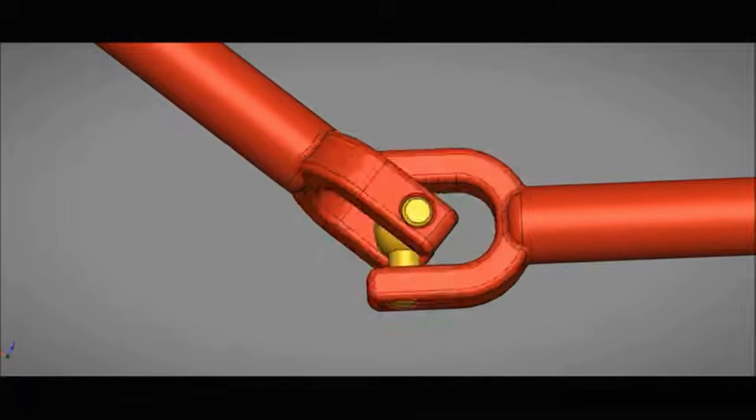Today, we're going to build one. So first I'm going to open up Autodesk Inventor Pro. This is the file I use for all of my computer design models, 3D models for 3D printing or for engineering projects. That's just because I get this software free from my university. The same things I'm going to show you on Inventor, you could also pretty easily use on SolidWorks or any other engineering application.

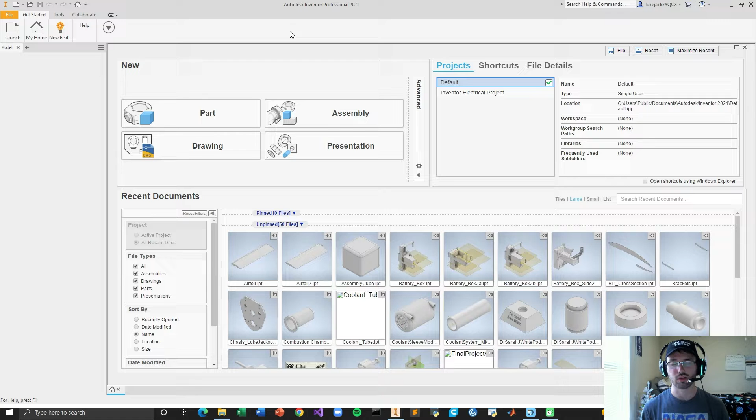So we're going to go File, New, Standard Part, Create. First things first, I'm going to design the part of the joint that actually holds the axle and rotates around that center piece. I call it the joint holder, personal part title preference.

So we're going to go Sketch, Create, Rectangle. Personal preference, I always start on the XY plane. Now I want this to be 100 millimeters by 50 millimeters, but I'm going to start by creating half of the part and then revolving it. So I'm going to start with 100 by 25.

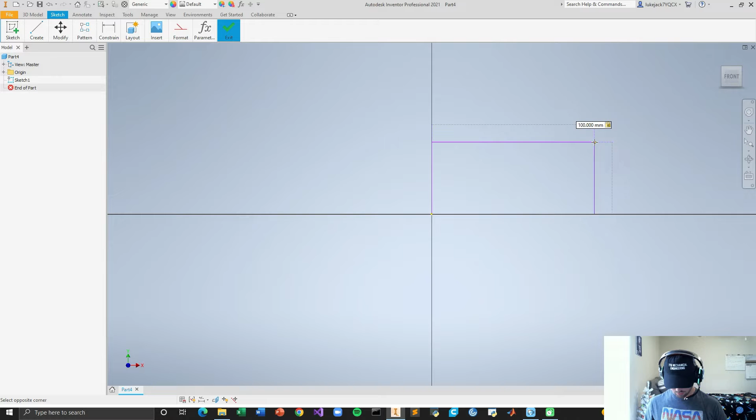And then, like I said, right away we're just going to revolve this piece, go 3D model, create, revolve. Already have this plane selected as profile, axis, the x-axis. Now instead of 360 degrees, I'm going to rotate this 180 degrees. That's because I'm using a 3D printer to manufacture this joint.

When I go to print this out, I'm going to have a hole for the axle coming through here. I need to actually be able to put this piece together around the axle rather than having a hole here and having to feed an axle through to meet at a joint with a cap on the end. It's going to be a lot easier to assemble this by just printing the whole axle with the cap on the outside and the joint together all as one piece, placing this piece and this mating half around the axle, gluing it and calling it a day.

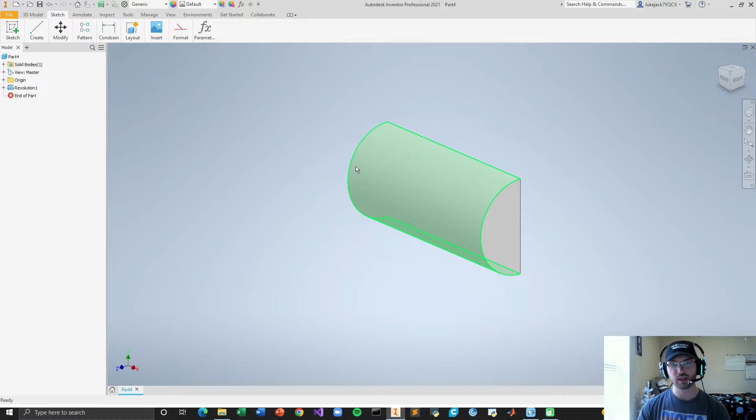Another reason for that is if this were a full cylinder and I go to print this out, one of these curved sides is going to be on the print bed. And when that happens, I'm going to have supports that go all the way across here. This entire face is going to be covered in support structure. Now it's going to be a big problem when I go to try to take the supports off and sand this down. It's going to leave extra material we don't want, or we're going to have a lot of sanding we don't want to do.

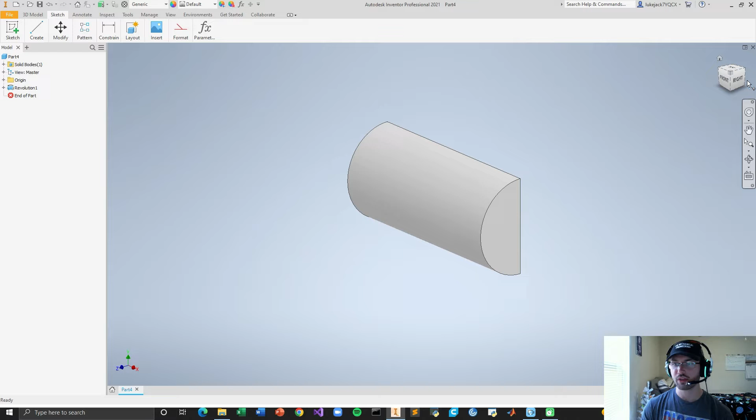It's going to be a lot easier to just make this in half and then print 4 of these for the total joint together. So now that we have our half, I'm going to come around to this side, and I'm going to cut out the section that's going to wrap around and actually have the holes for the axle to hold that joint.

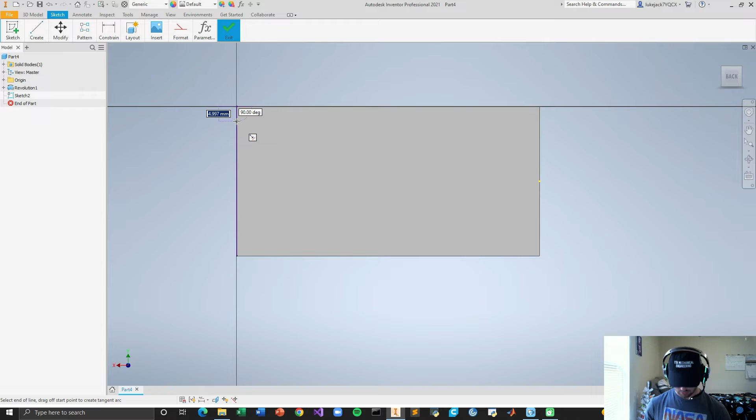So I'm going to go Sketch, Create, Line. I'm going to go right here, and I'm going to start by putting in the lines that mark out the sections here. First we're going to have 10 millimeters coming down at 90 degrees, and that's going to mark out the section that's going to hold the joint. So you can imagine if this line around is the section coming up, the axle would come through here and the joint core is going to be right here.

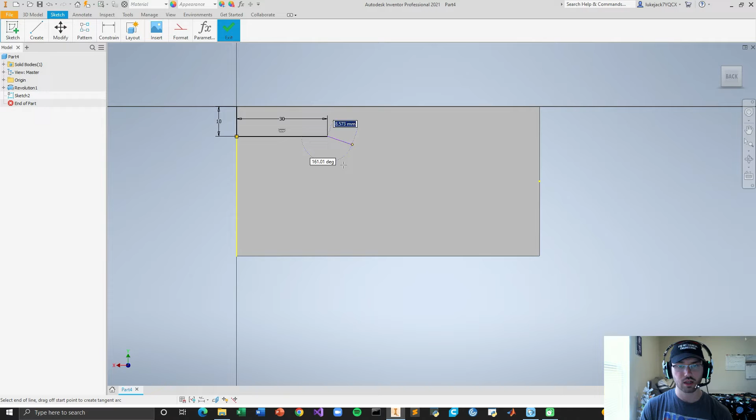I'm going to bring this over here 30 millimeters, another 30 millimeters, and then up another 30 millimeters. What this does is create a nice square for that joint core to come into while producing a full centimeter on either side to actually hold that hole. This way we have thick enough material on either side so that we don't really risk significant potential for stress and catastrophic failure around the points that normally develop a majority of stress.

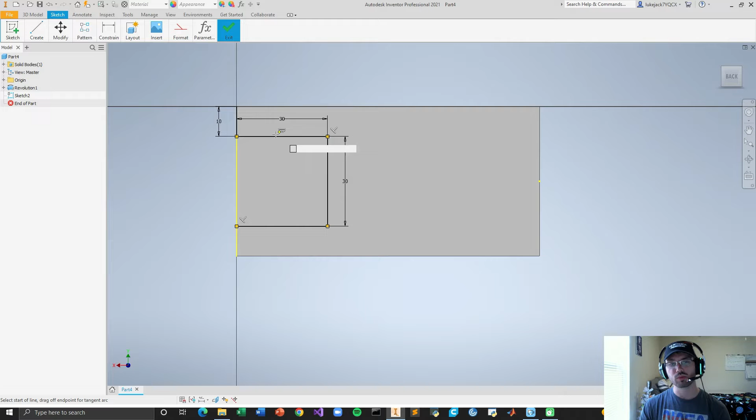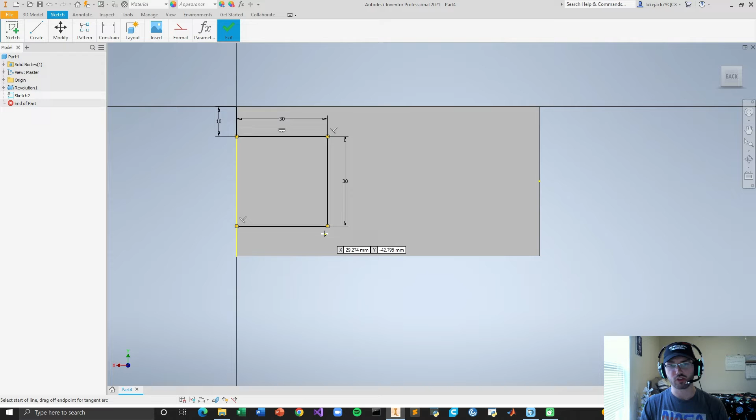Now, one problem that's going to develop here is stress over time as this part wants to move outward like this or inward like this, really just as a result of stress from repeated rotation. All that stress is going to build up at this point here, and that provides a point of potential failure. Plus, this one square probably isn't going to be as much room as I need. So to kill 2 birds with 1 stone on this one, I'm going to go Sketch, Create, Arc.

Make a half circle right here. What that's going to do is first, thin out this joint cavity for extra space for motion. But second, and pretty importantly, this is something we learn in classes typically taken in our first or second year of an engineering program: the stresses that normally develop center around this one corner. Once you put a fillet across that corner, which would now be down here, all that stress distributes evenly across this full radius.

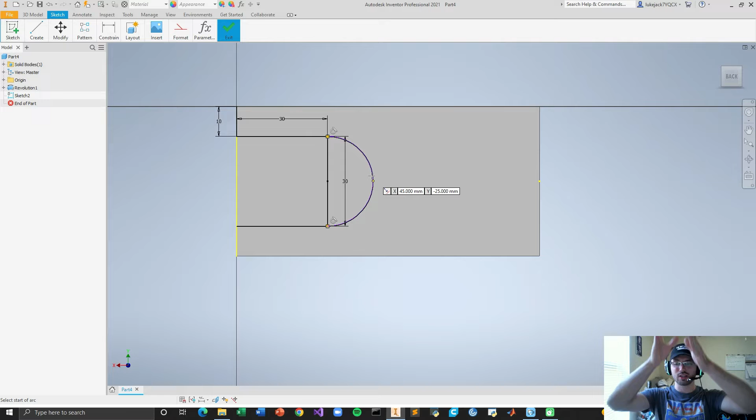This is actually, from an engineering perspective, why you see the roots of a tree come down like this and then spread out. It spreads the stress out across here in a really phenomenal pattern from an engineering perspective. So we have our full cavity here marked out as lines.

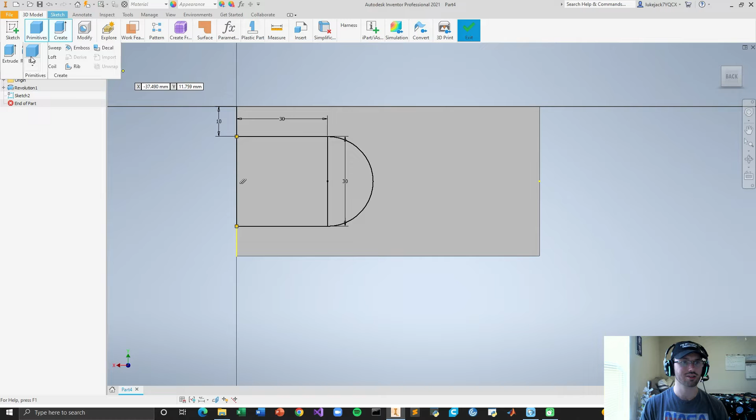We're going to draw another line right here to wrap up that sketch. That way we can select these two planes and extrude the thing all the way through to cut out that material. So we're going to go 3D model, create, extrude, select both of these profiles, select extrude cut, and then just any large number that's going to completely take care of all of the material there.

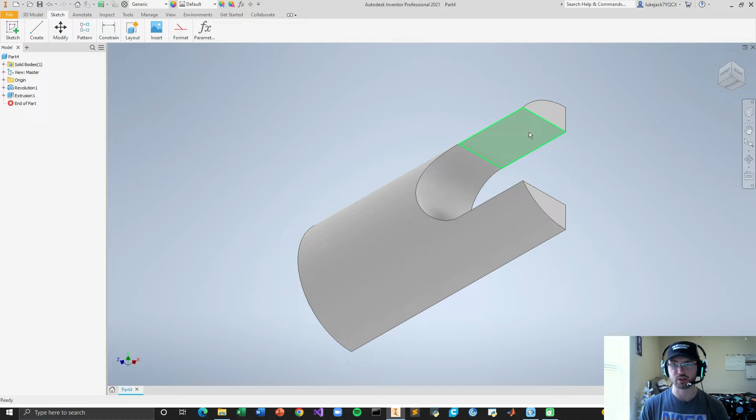So now we have a lot of this pretty much done. First, before we're finished, we need to make the half circle for the axle that's going to come through. So I'm going to go sketch, create, line, set right here.

Now I know that the hole for the axle is going to go somewhere on this plane, probably closer to here than to here, because wherever the axle goes, the other piece is going to need to come over as much as this section, the whole section, and another one of these sections over. I need to make sure that these parts don't interfere.

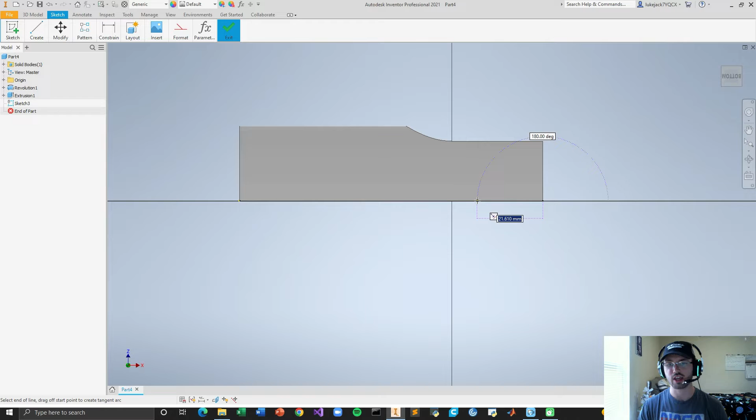So I have a total of 30 millimeters this way. I'm going to make sure the other part doesn't come further than 25 millimeters, just to have as much room away from any potential interference as possible. So 25 millimeters, I could say a centimeter, and then half a centimeter for the hole, and then another centimeter to account for this centimeter section on the other piece.

But that would produce a really small hole, and when we go to 3D print a piece, we have to account for the potential for any section being printed to have material spillover. So an axle going through a 5 millimeter diameter hole would have to be no more than 3 millimeters in diameter. That becomes a really, really narrow axle when we start talking about PLA and layers.

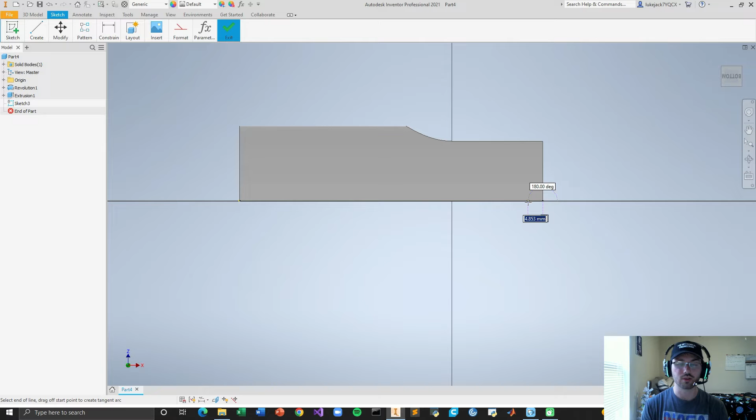So what we want to do is make sure there's enough room in this hole - not quite 10 millimeters, because we don't want just a 5 millimeter section that would risk failure. Instead, I'm going to make the hole 9 millimeters and account for 8 millimeters on either side. That still accounts for 25 millimeters, but this way I have a larger hole and can use an axle much larger than 3 millimeters while still having enough clearance to avoid interference when putting this part together.

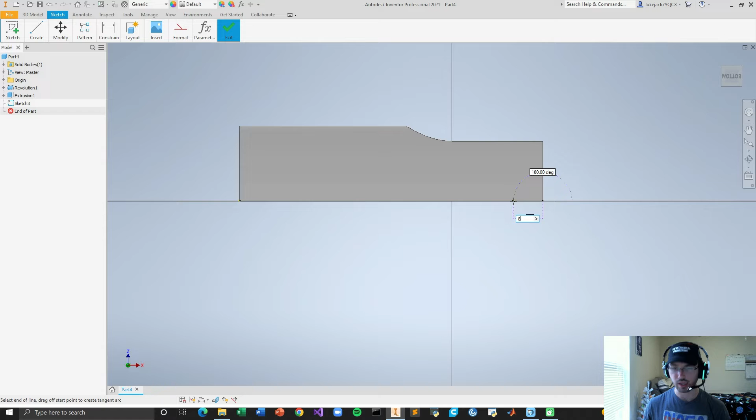So I'm going to come out here, 8 millimeters, 9 millimeters, and now I'm going to go create arc, make a half circle at 4.5 millimeter radius, and then 3D model, create, extrude, and we're going to cut this section out just like we cut the last section out, except now I'm going to do a two-way cut so I can have this hole on both sides.

To make that extrusion, make sure I absolutely take care of every bit of material I really want to get out of here. It's okay to go overkill on the distance you're extrude cutting, because all it's doing is making sure you're cutting out the material. I could go 10,000 millimeters - it's still cutting out the same material. So now we have this section cut out.

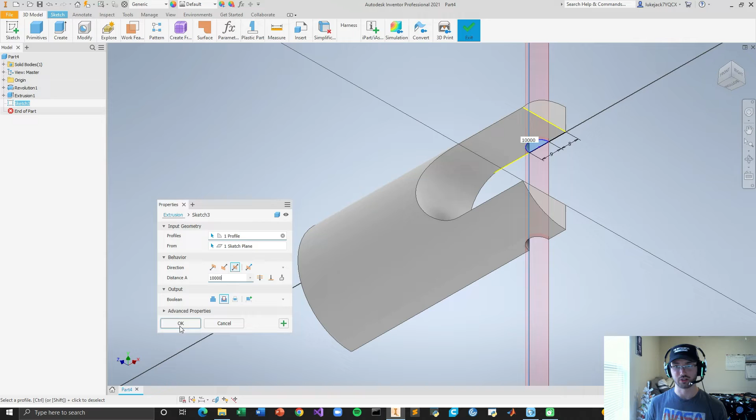The one thing we have left to do is smooth this out and really cut out a lot of this section. The reason being, and I printed out pieces to display this, when we take two parts printed out just like we see here and try to put them together as a joint, it winds up not working because they come out to interfere.

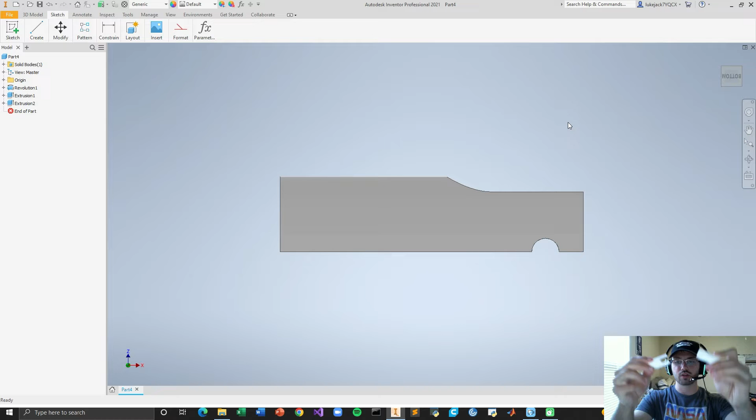The reason being, this part is 50 millimeters - well, this is half size, so this part is 25 millimeters from here to here, but only 15 millimeters from here to here. But that 25 millimeters on either side here, or 50 in the case of the design, has to fit inside that 30 millimeters, or 25 inside this 15.

This outer side is way too big for this, and even though you can see it kind of comes in, it wouldn't be the full 50 - it's still between 30 and 50, trying to fit in 30. So that's always going to interfere. It's never going to work.

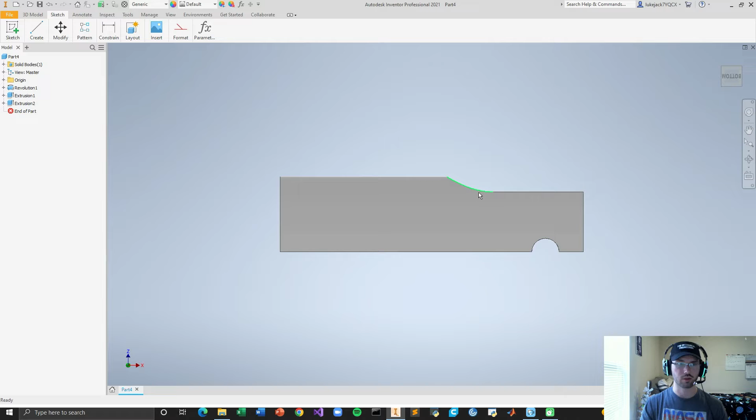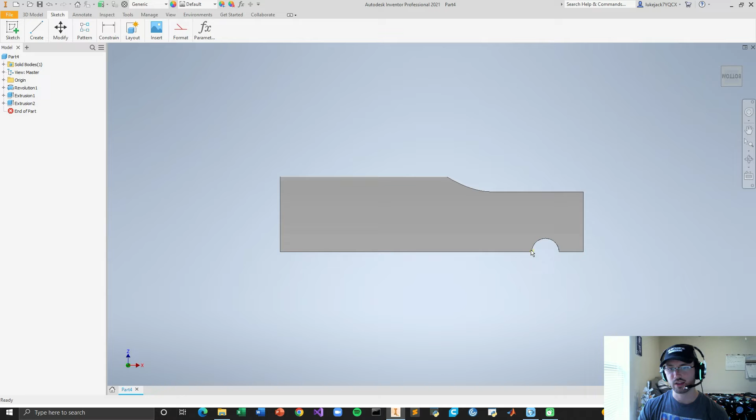We need to cut out the excess material right here. Since I know that at this axle hole both parts are going to have an axle hole, and the other part is going to come an additional 8 millimeters over this way, I'm going to decide that since I have 30 millimeters of distance this way, I want some extra room on either side to make absolutely certain they aren't going to interfere. So instead of making this 30 millimeters, I'm going to make it 24 millimeters, so I have a full 3 millimeters on either side between each part.

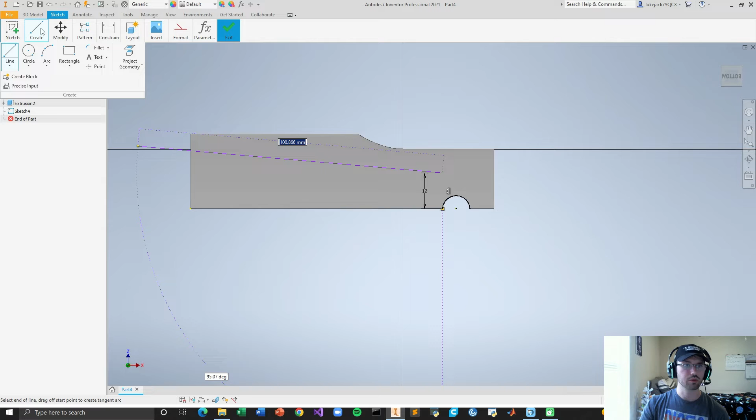To make sure that happens, I'm going to create a line and work on this plane. I'll come right here to the edge of this axle hole, go up half of that 24 millimeter distance - 12 millimeters - and then create an arc, going from the end of this line to the end of this part to produce an arc. Now, I want this to flow about like this, in an S shape.

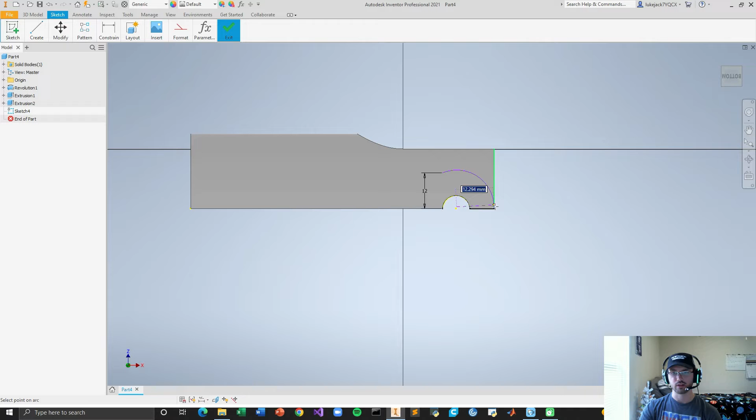I can't have this arc coming out like this. I can't have it like this either, because then I have a straight line - it's too thin right here, and it just doesn't look good. So I'm going to go right around here. The reasoning is it's coming almost to parallel right when it meets the line.

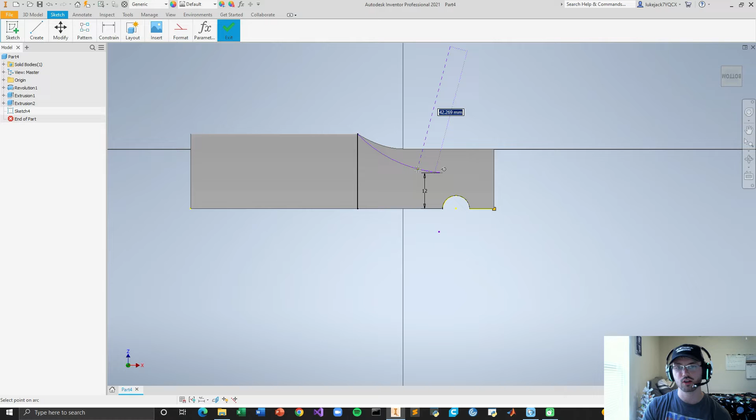That way, when I go to produce another arc from here to here, it's going to be a lot easier to make this arc meet that first arc tangentially. Autodesk Inventor does a really cool thing where it actually shows you when the arcs are meeting tangentially, right here, when you see that circle meeting a line. So now we have two arcs, and we can check that they are in fact meeting nice and smoothly.

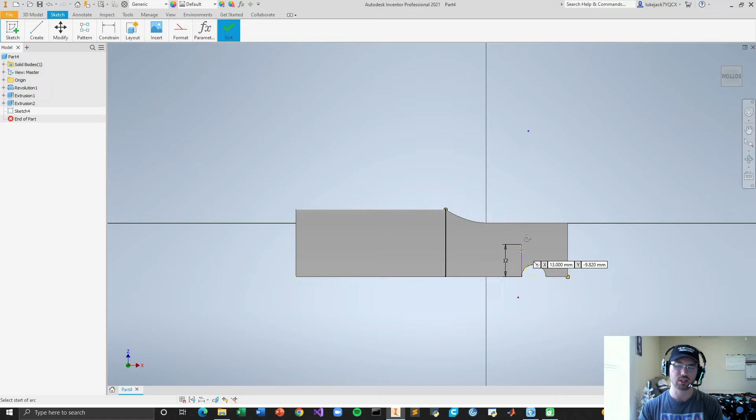The reason I'm doing that is mostly for aesthetic preferences. I don't want a jarring edge between the two arcs, but it's also for making it easier on my printer to not have to produce that hard edge, and to mitigate any potential stress accumulation at an edge, or for those edges to potentially butt against each other. So we're making as smooth a shape as possible.

Then, to extrude anything, we have to have a wrapped up sketch. So I'm going to draw a line out to here, and a line out to here. Now I have a completely enclosed sketch. I can go to create, extrude, select this full plane, extrude cut two ways so I can take care of all of it right at once, and select OK.

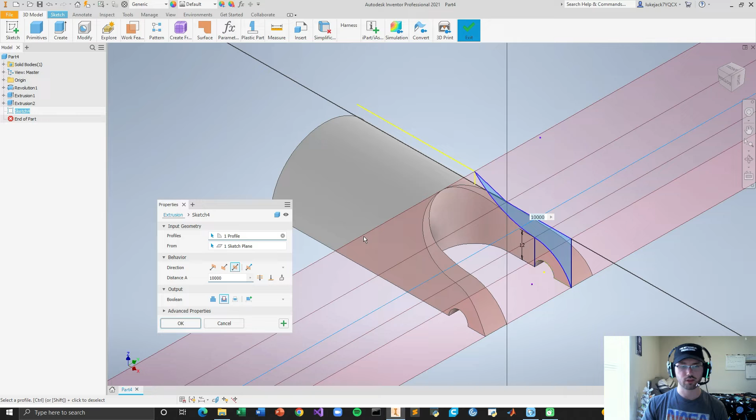Now this is almost finished, but you can see we have these flat planes. I don't like that - partly it just looks ugly, but another reason is this can produce another point of risk for those parts to interfere. I don't want to have done all this work to cut out this extra material and then wind up with these edges ramming right into each other.

So I'm going to produce a fillet across here. That way, when the pieces come together, they're going to curve away from each other. I'll go to 3D model, modify, fillet, then select these edges here, and try to produce as big a fillet as I can get away with on this edge.

So let's try 6 millimeters. Okay, when it shows a line like this, that means the radius I put in is too big for that edge. So I'm going to bring it down, let's just say to 5 millimeters, and we can make that fillet - so we're going to go ahead and do it.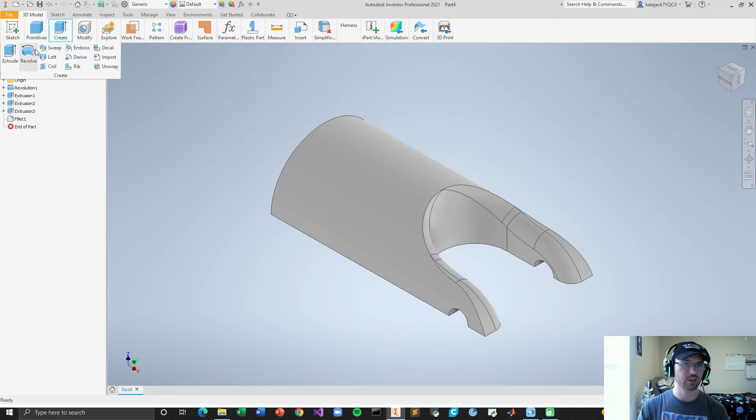Like I said earlier, this is going to make sure the parts curve away from each other actively. Then just to round this out, make it look a little nicer and make the assembly smoother at the end of the day, I'm going to put another fillet right on these edges. It's going to be a much smaller fillet, especially since I can't have a 5 millimeter fillet right there - this one's going to be about 2 millimeters.

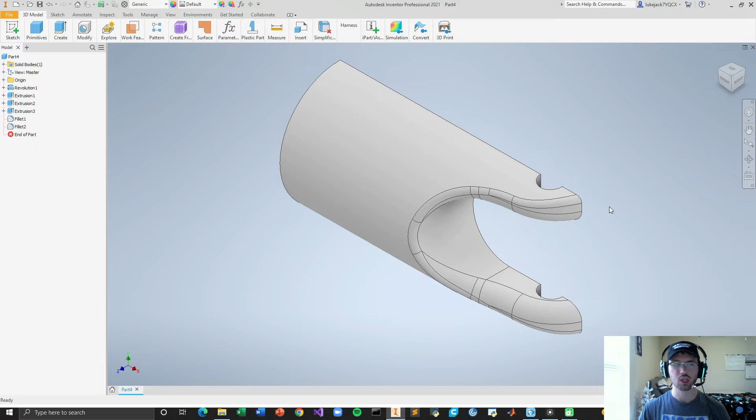Apply. And now we're done with this part entirely. We'll be printing 4 of these to make the total joint. Next, we're going to move on to designing that joint core. Let's get to it. We're going to go File, New Part, just like last time. And also just like last time, we're going to go to Sketch, Create, Rectangle, and start on the XY plane.

Except this time, we need to make a part that's going to fit inside the cavity left by the joint holder pieces. So we have 30 millimeters in one direction, 30 millimeters in the other direction of total space. Now, whatever joint core we design, we do not want it to fill all 30 millimeters because that's going to cause some really rough interference and it's just not going to work. So I'm going to make sure that this has plenty of clearance to it.

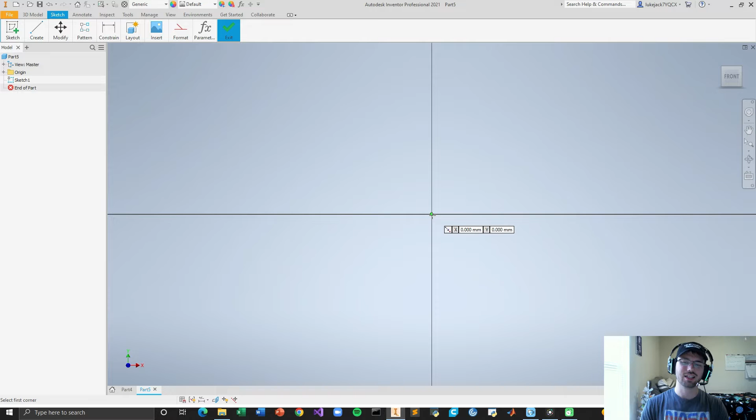And I'm going to start with a 20 millimeter by 20 millimeter square. This produces 5 millimeters in all directions to make sure that I have as much clearance on this part as possible. So then we're going to go to 3D model, create, and extrude. Let's bring it out about 15 millimeters.

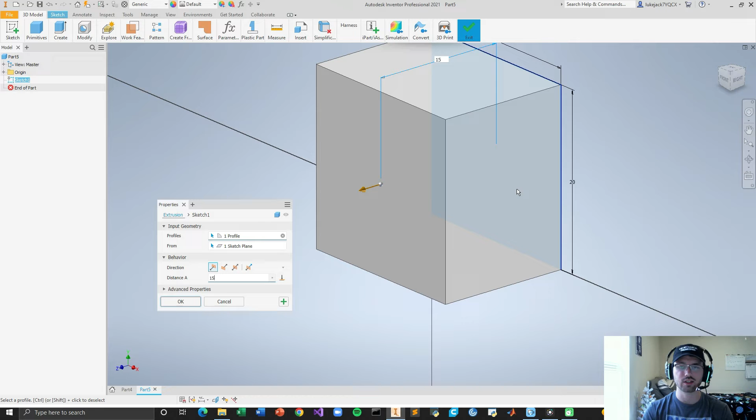I'm not bringing it out a full 20 because we don't need this to be a full cube, and I only need an axle out of these faces, and these faces can be blank, and I don't need a full 20 millimeter width for the faces that the axles are coming out of because I'm not making a 20 millimeter wide axle. Even the axle base that we're going to make that's going to be there to reduce stress accumulation from that flat edge doesn't need to be a full 20 millimeters wide. So let's leave it there.

All right, then we're going to go sketch. We're actually going to start with the line because even though the axle and the axle base are both going to be cylinders, we have to start from the center of the face. So we're going to use a line to go ahead and find that center. Now we can also use this work tool placing a point on the center of this face. Both are plenty fine as long as you're not doing way too many steps one way when you could do it another way with way less steps, but this becomes about the same number of steps either way.

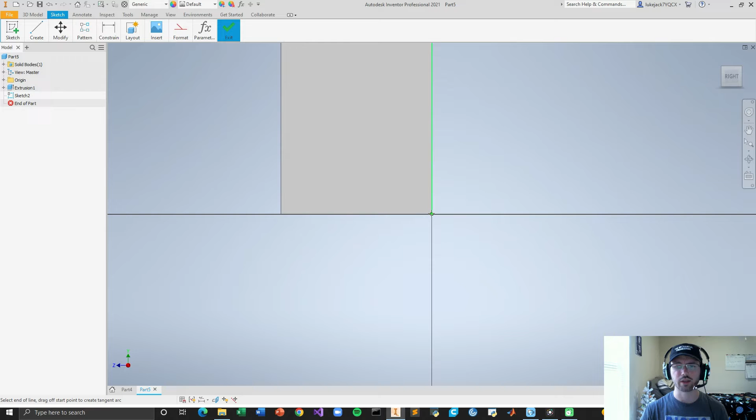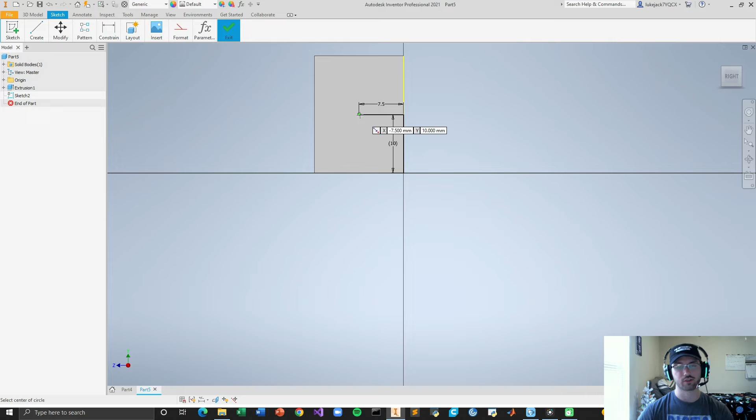So bring it up 10 millimeters and another line out here, 7.5 millimeters, and voila, we have our center of the face. We can go create circle. Now, with this circle, we're making the profile of the axle base, not the whole axle. So we're going to go ahead and actually make this a full 15 millimeters in diameter.

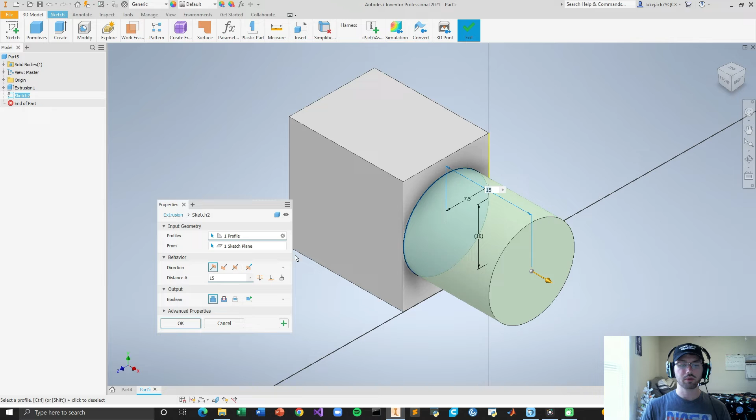And then when we go to extrude this, I have to remember, I have 5 millimeters of total space, not including any tolerances, between this face and the end of the joint cavity space. So I need the axle really to start before that to account for any 3D printer extrusion mistake or material spillover or anything like that. I need some extra clearance for that. So I'm going to bring this out 2 millimeters. That's going to make sure I have 3 millimeters of extra space in all directions to really make sure that I never have any interference between these parts.

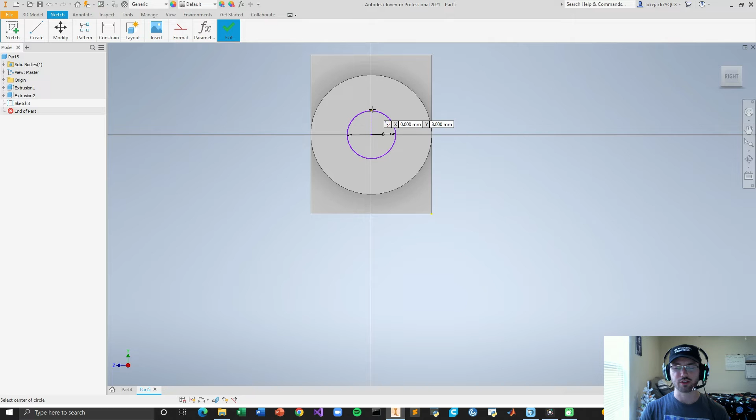So I'm going to make the profile for the axle itself and then extrude it out into the axle. So I'm going to go create circle right on this plane. Now here I have to remember I made the axle hole 9 millimeters across. I need plenty of clearance between this axle and the axle hole, but not so much clearance that I make an axle that's too thin to function without breaking. So I'm going to make this axle 6 millimeters across. That means I have 1.5 millimeters in every direction while having an axle that's not going to be so thin it's going to snap the first time I try to rotate this joint.

So next I'm going to go 3D model, create, extrude out from this circle. Now I have 3 millimeters between the face of this flat cylinder right here until the start of the axle hole. So I need at least 3 millimeters extra length on this axle. Then I have 10 millimeters of axle hole, so I need at least another 10 millimeters on the axle. But I need an axle cap at the end to be wider than the hole to make sure that the axle doesn't slide out of the hole at any point during operation. And I want the same clearance on that side as I have on this side. So I'm going to go ahead and make this axle 15 millimeters long.

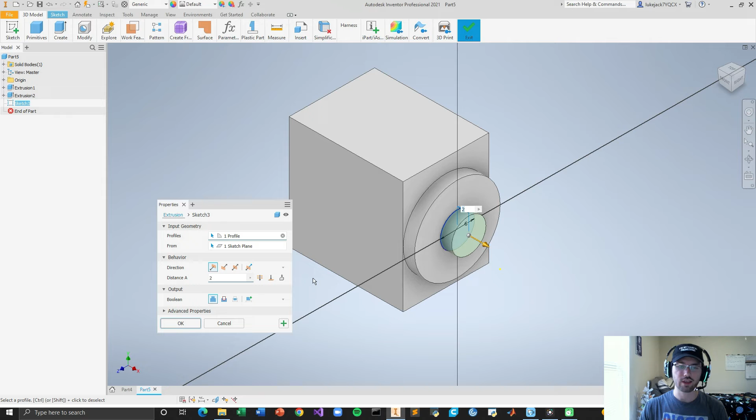That's going to provide 3 millimeters clearance on the inside, 2 millimeters of clearance on the outside before I add that cap. That's going to make sure that no matter what happens with the printer, unless it's a complete malfunction, and I would have to reprint anyways, this part is going to work and the joint is going to rotate at all positions that it's capable to bend to. Now I'm going to make the profile for that joint cap I was just talking about. It's the same deal.

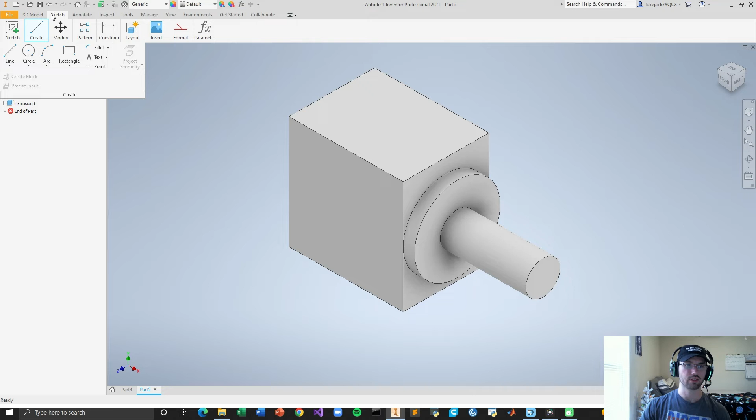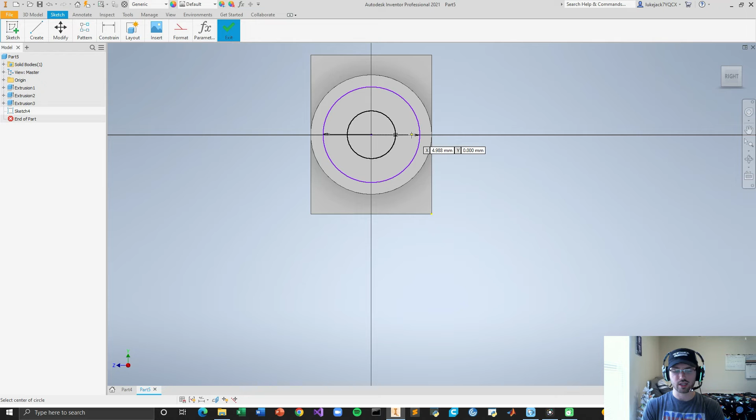Pop a circle at the end of this cylinder, except this time I'm not going to make it quite as wide as this. I'm going to make it wider than the axle. I need to make it wider than 9 millimeters because 9 millimeters is the width of the hole. Should probably make it wider than 10 too. I'm going to make this 12 millimeters across. That way I have 1.5 millimeters on either side in all directions between the outside edge of the hole and the outside edge of the cap.

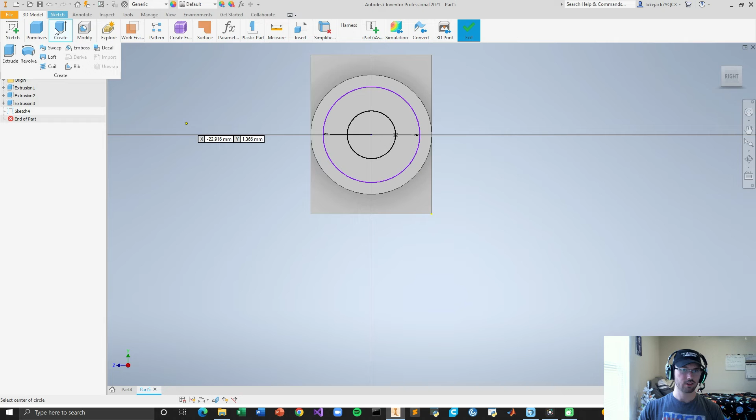That's going to make sure that this cap is going to hold the axle into the hole, but it's not so far out that the cap might have more leverage and break off of the axle, or the cap might wind up interfering with the joint, anything like that. So I'm going to take this and extrude this out 3 millimeters, just to make sure I have some material at the end of the cap there.

Next, I want to round off a lot of this. The reason I want to do that is on these inside edges, I want to round them off to reduce that stress accumulation at that single edge. On this side, I want to round this edge out because I want to make sure that this is smooth and as tucked away as possible so that it doesn't interfere with the motion of the joint. Because remember, this will be on the outside of the joint hole, which on one piece is going to be on the inside of the joint cavity on the other piece. So I need this edge to be rounded out for that reason.

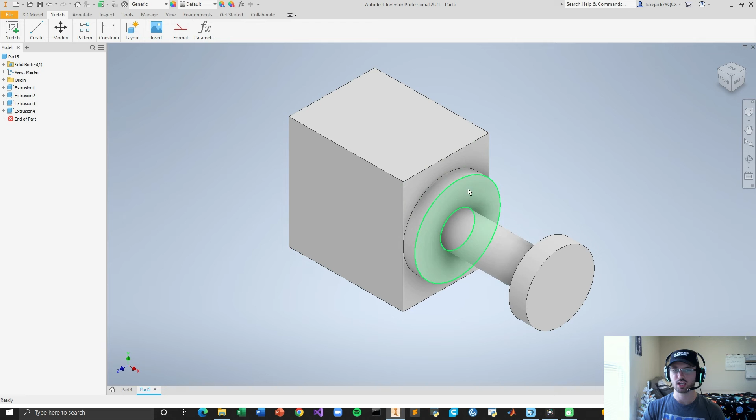I also want to go ahead and round this edge out, mostly for aesthetic purposes. I just don't like the look of a flat shape there. And it's also going to make it a little bit easier on the printer to make a round shape here versus a flat edge when we actually go to print this part out. So I'm going to go 3D model, modify, fillet.

So I'm going to start with this outside edge. I'm going to select this, produce a 3 millimeter fillet. That's going to bring that curve all the way to the base of this cap, make it as smooth and tucked in as possible. Now I'm going to select this edge and produce a 2 millimeter fillet. We're going to have a nice smooth rounded off part. Then I'm going to go to these internal edges here, and I'm also going to make a 2 millimeter fillet.

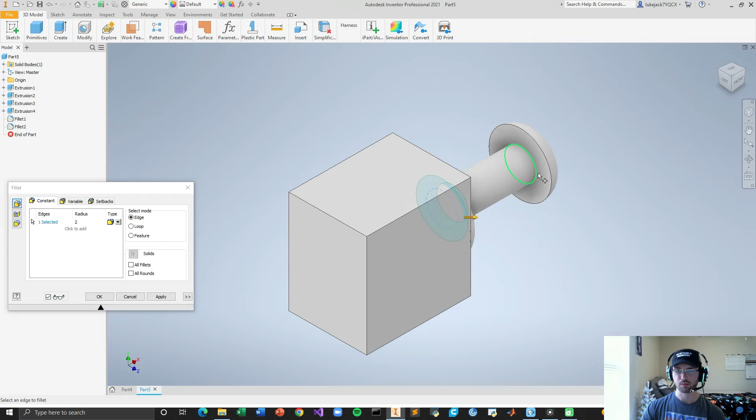Justification for that is I have a 3 millimeter clearance here, a 2 millimeter clearance here, and a 1.5 millimeter clearance this way. So we don't actually get to a point where this could possibly interfere with this until we get right about to here, further up than half the radius for this fillet. So we won't actually wind up with potential for interference here. Instead, we'll wind up with a nice curve here that if it touches that edge of the joint holder, it'll just produce essentially a rolling bearing without the lubricant for this to glide across.

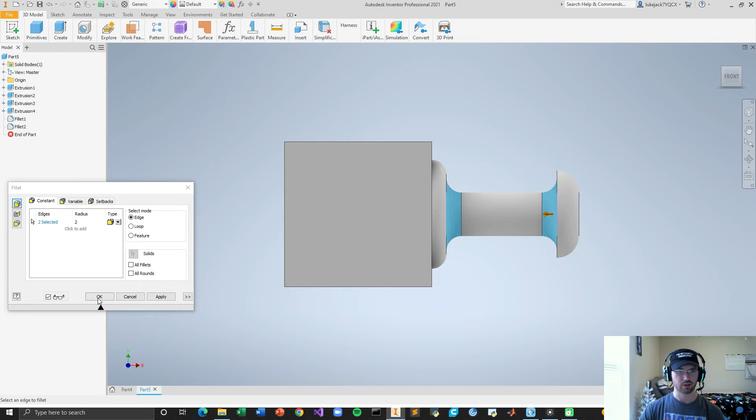So I'm going to go ahead and select OK because we've finished all the fillets that we need for this section. Now, I have one full axle, but I need 4 of these, and I don't want to do this all again. Partly because I just don't want to do it all again, but also because it's possible for me to produce something on this side, or on this side, or on this side that's a little bit different than this axle, and I need them all to be the same as much as I can possibly manage.

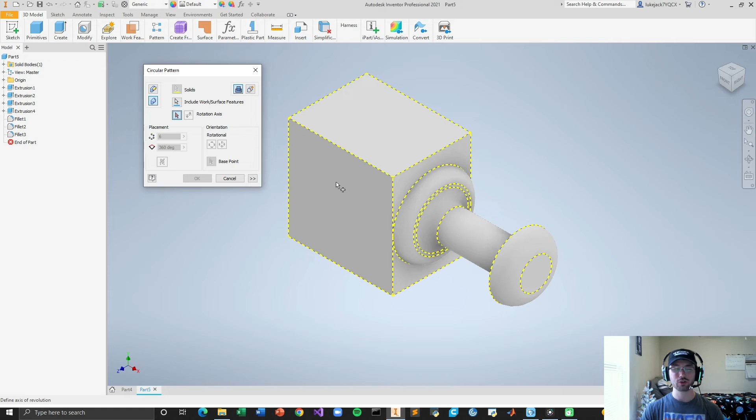So I'm going to use pattern, circular, and I'm going to select the entire thing, make sure the entire thing rotates, and I need to select an axis of rotation. Now I want to rotate this about the center of this face right here. Problem is, I don't have an axis of rotation, so we got to fix that. Let's go to Work Feature, select Axis, and then we can produce all kinds of axes. We can make just an axis that'll come out from wherever we click. We can make one from a line or an edge.

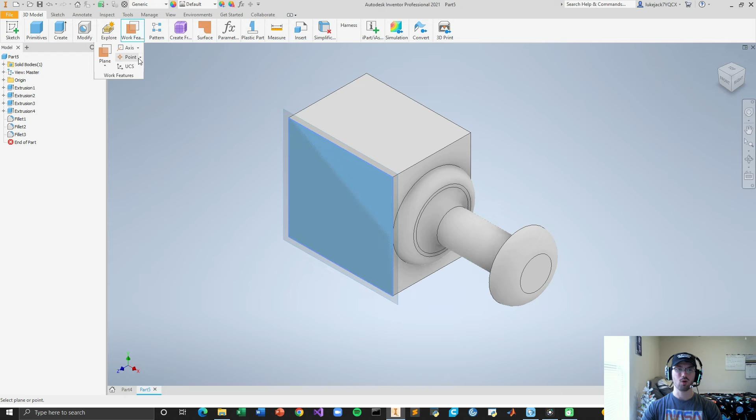We have all these lines and edges, but we want it to come out from the center. So what looks really good to me is normal to plane through point. That sounds awesome. We want it out from this plane, but we want this to come through a point in the center, and we don't have one of those. So let's go back to Work Feature, Point. We need a point right in the center. So center point of loop edges. That sounds great. Let's center that point to this face, these edges. Sweet. Now we have this point right here to produce our axis from. We can go normal to plane through point.

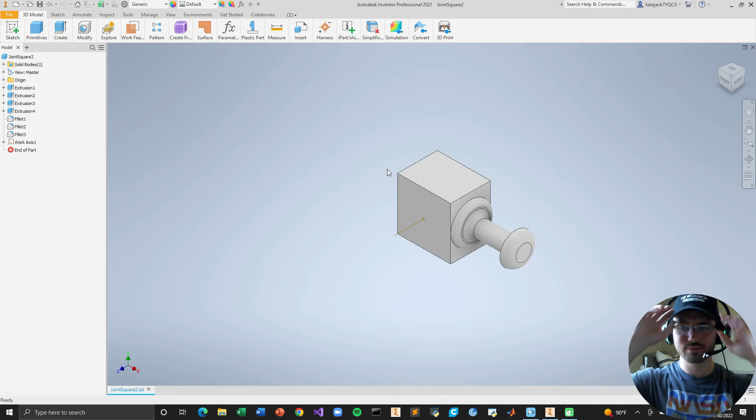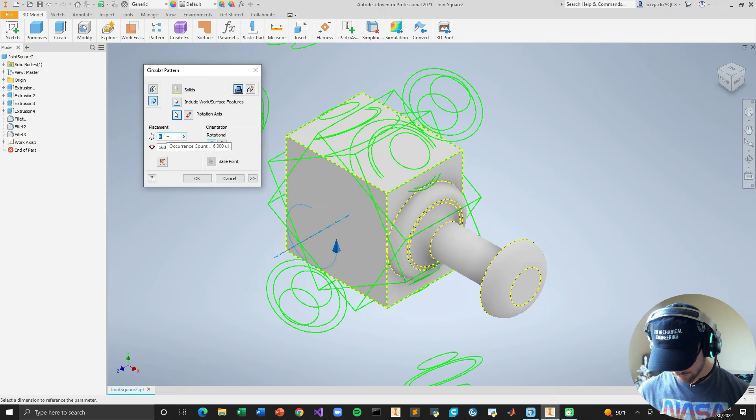So at this point on this plane. And bada bing, bada boom, now we have ourselves an axis. So now I'm going to go back to pattern, click circular, all faces. For axis of rotation, we're going to use the axis that we just made. Now the default setting for a circular pattern is 6 repetitions around 360 degrees. We do want 360 degrees, but we don't want 6. We only want 4 axles. So it's going to place that at 4, and there we go.

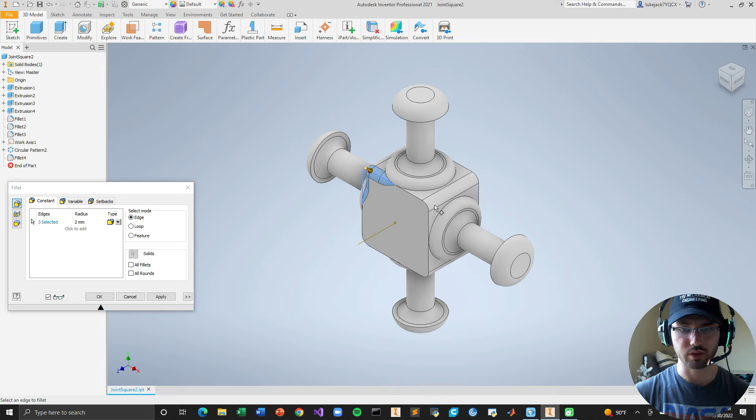So next we're going to put fillets along the remaining flat edges, and then cut this in half so that we have a flat face to lay on the printer bed, and then we'll be done with this part. So first I'm going to go to Modify, Fillet, and get these 4 edges. Click OK. Then we're going to go Modify, Fillet, and get all of these edges. And now this is fun. We only actually have to do these 4 because the other ones we're cutting off. Go ahead and click OK. That'll get out of the way. And now we have a rounded out part.

Now we just need to cut this in half so we have a nice flat face for that printer bed so that we don't have to have any extra supports for these caps, for the axle, for the rounded bit, sand stuff off. We don't want to do any of that. We're going to cut this in half and print 2, glue them together, and then we'll be set.

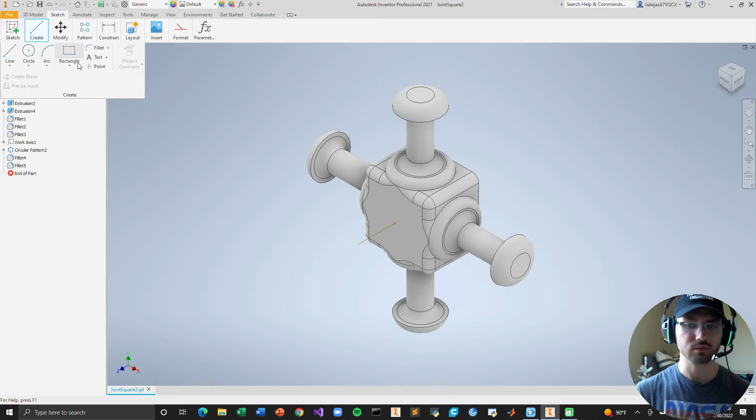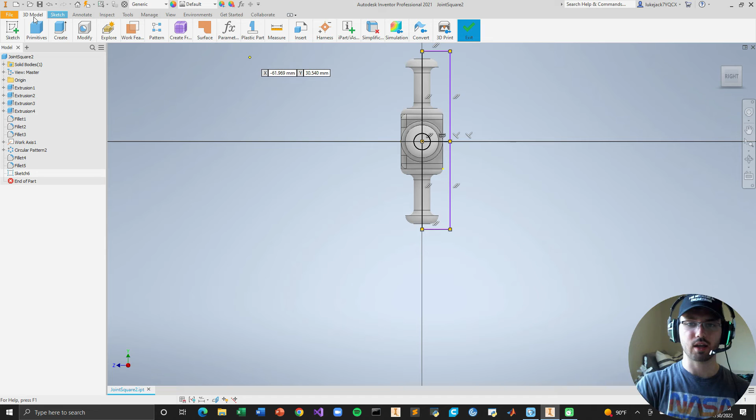So to do that, we're going to go Sketch, Create Rectangle, click this plane, and I'm going to draw a rectangle that's going to include the whole half of this that we're cutting off. That's this right half, because remember, we didn't fillet this side. That's because we don't want this side. So I'm going to make a rectangle to cover this entire half. And then I'm going to extrude cut the entire thing. So I'm going to go 3D model, create, extrude, click our face, make sure it covers the full rectangles.

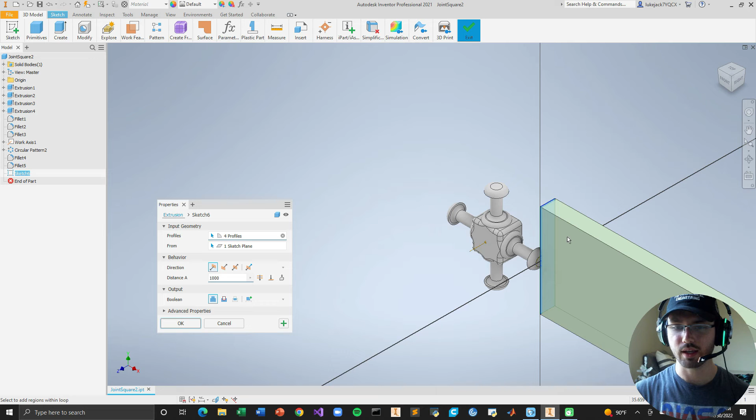See, that's something you might have happen where Inventor recognizes that there is a quarter circle right here that is intersecting the rectangle, and it might try to click everything outside of that quarter circle. But we want this entire half. We don't want any piece sticking out the side. So then we're going to go extrude cut this whole half off, and there we go. Now we have a completed half of the joint square. We're going to print 2 of these for the joint holders, scrape it up, assemble the part.

So now I have all the joint holder parts loaded up into my Ultimaker Cura 3D printer file rendering software. And I'm doing 2 things that are pretty important here. First, I'm printing the joint in 2 prints. The first one is going to be all the joint holder pieces that you see here. And the second one is going to be the 2 joint square pieces. The reason for this is I have 2 different colors of filament that I want to use for this project. So I'm going to print the joint holders in white and then the joint square in blue. That way the joint square will be bold against the joint holder pieces and I'll be able to see the parts moving around as I use this joint.

The second thing I'm doing is I'm printing this at half size so that this can fit on my printer. When I bring this in at full size, it's 100 millimeters this way and 50 millimeters this way. Well, my whole bed is 100 millimeters by 100 millimeters, so that one part would fill up this entire section remaining here. This way, I can print the thing at half size. It's a plenty big enough size, honestly, for the fully assembled universal joint. So half size for me.

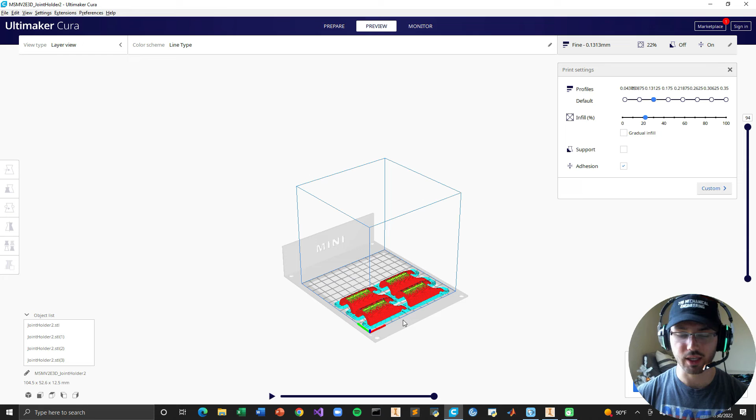If you have a larger printer or if you want to wait while each part prints on its own, feel free to print this larger or feel free to print this even smaller if you prefer. One of the points of this universal joint is that it can be used for multiple applications and be sized according to the project that you're working on. So now I have the joint square, both pieces loaded up to print. I'm going to port this over to the printer and get it set up.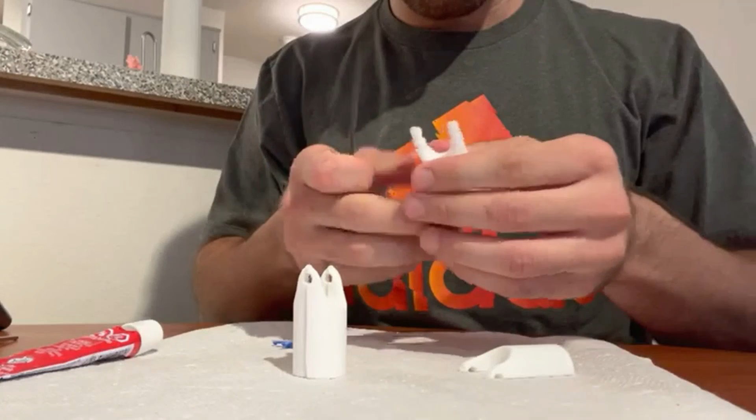Now I have everything printed out and it's time to assemble. First we have to sand out everything. That means all the flat faces that are going to be joining together as well as the holes that will be receiving the axle. And here I'm using a round file as well as a flat file to get those holes down with the round file and get the flat faces down with the flat file. That also includes those corners you can see me filing down here. It's really making sure that everything is going to work and assemble as smoothly as possible.

Sanding down all the parts. Next, I'm going to start gluing it together. I'm using this liquid cement for plastic adhesion. I find it to be a really solid glue for plastic assemblies like this one.

So I'm starting by gluing together the joint square itself. That's because this thing is going to have to come together and then the joint holders are going to glue together around the axles created by this joint square when I glue it together.

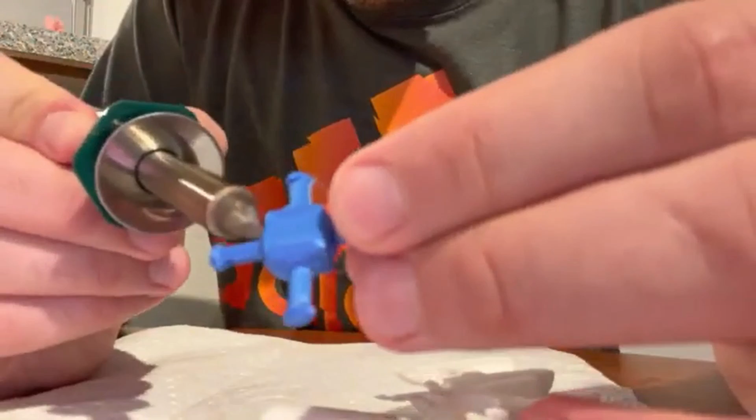Now that it's dry, I'm getting my wood burner here and I'm doing what I like to call plastic welding, where really I'm taking advantage of the fact that the method of manufacturing of a 3D printer is to melt plastic and apply it to other plastic. So now I'm taking what is layered melted plastic and I'm melting it together so that as far as the material is concerned, there's not really any distinction between the two parts that were 3D printed and the conjoining faces that are now melted together, just like they were in the 3D printer.

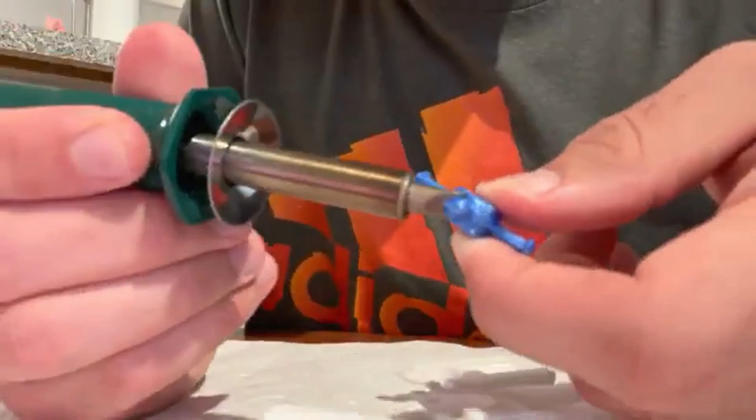Now, anyone who knows anything about welding will know this is nothing like most welding applications, but it's still fun to call it plastic welding, so that's what I call it. We're doing all the outside edges with this. Really make sure that everything is fused together as much as possible without compromising any of the structure and the integrity of the actual piece.

So I'm going around all the edges here, making sure everything is put together nicely and smoothly and cleanly before I go and assemble the joint holders around the joint square. It dries really quickly, as you can see there.

So now we've got the joint holders, and we're going to place this around the axle, starting with the first one. Now, the benefit of the way that I printed this is being shown now in the assembly: I can take those joint holders and simply place them around the axle, and the cap is already on the outside, and we don't have to bother with a bunch of tiny pieces being assembled.

So I'm starting with a couple dots of glue. I'm going to assemble this just like I showed you with placing this around the axle. I'm going to hold this together and really just clamp it with my own fingers while the glue dries. Making sure, of course, that the axle can move freely and there isn't any glue or melted plastic keeping it from moving around as I'm assembling this part.

Now that the glue is dried, I'm going to come around and do the exact same thing with the wood burner on the outside of this joint holder. Going around the edges, going across the seams, these large seams on the outside, as well as where they meet at the base here, and even on the inside where I made that space for an axle to come into.

And I'm being very careful to make sure that I melt the plastic together, but I don't stab into the plastic with the wood burner and melt a hole into the plastic or anything like that. Going around all the edges and lightly touching it with this wood burner to melt the plastic together just enough that the pieces form a strong cohesion and stay together. Now you can see I've plastic welded all of these seams together and the part is holding together pretty nicely.

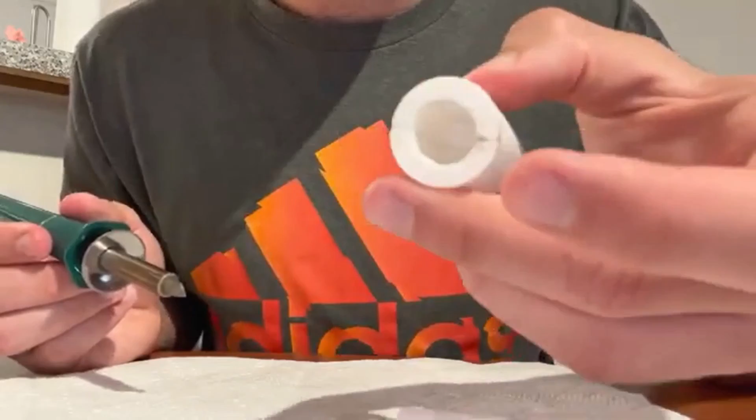So now we're going to do the exact same thing as we did with those two joint holders with the other two joint holders around the other axle. So we take the joint holder, set it, go ahead and apply those dots of glue, then place the other joint holder right around that with the axle, making sure that the axle is still inside the axle hole. And again, we need to make sure that the axle can move around inside the axle holes that we've made for it.

In this particular piece, there was a little bit of a printing mess up on the print bed where there's just a small indent in the seam where those were supposed to join together so that at that point they weren't actually touching. So I went ahead and filled that in with some glue just to make sure it stays together.

Now we're going to come around those edges, make sure everything is aligned properly, just making sure that this is coming together and that the pieces are melding together really nicely and aren't going to come apart after repeated use. And again, exactly as we did on the other side, we're coming around here and melting all the seams together.

Now we have a completed part. It's all staying together. It's moving around just fine, exactly as we wanted it to. And that is a universal joint.